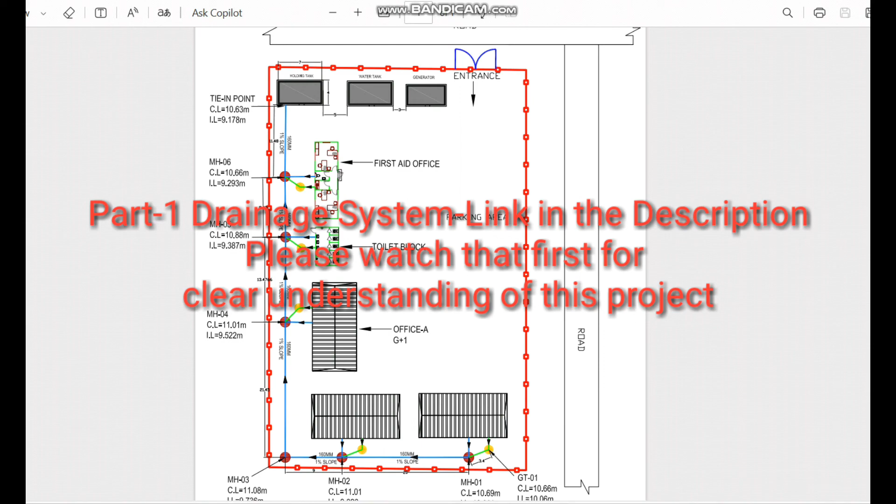In the last video of the drainage pipe system, we discussed the location of the holding tank, like where to place the tank, ground level or cover level, then the invert level of the pipelines, then the purpose of the gully trap, then different cases of drainage pipe connection from building to manhole and which one is acceptable. Then we discussed the pipe slope requirement as per IPC and how to find out the correct slope.

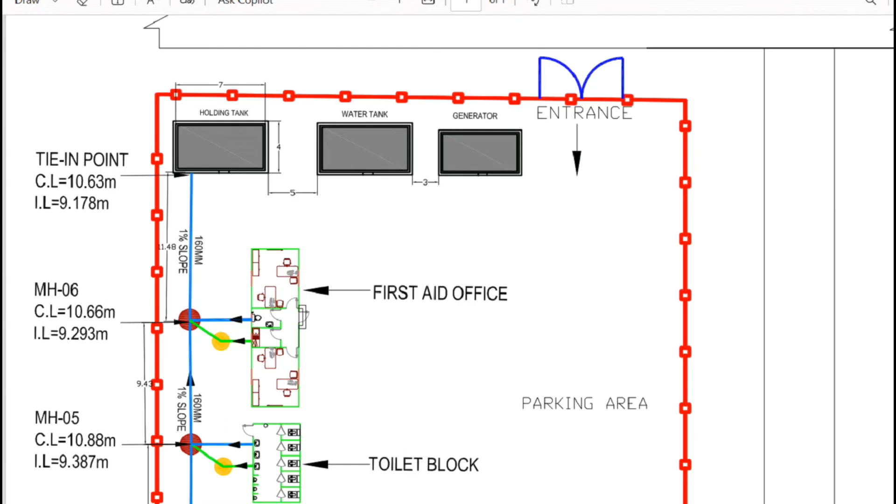In this site office project, we have manholes for collection at each building block. So here all our connections are going to the holding tank. So in this project I propose a holding tank, but most of the time I see people get confused between the holding tank and septic tank; actually both are different. So let me explain this concept very quickly and then we will continue our next discussion.

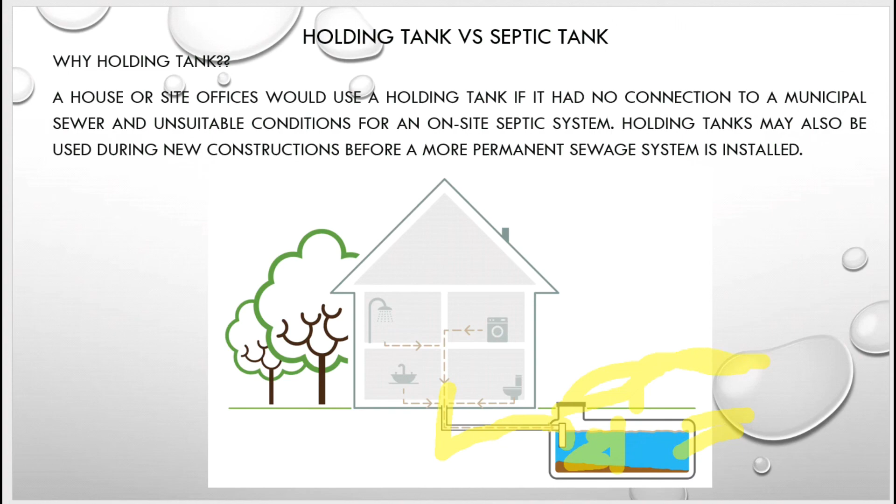So in this image, the sewer water and the waste water is discharged to the holding tank. Here only an inlet is available in the holding tank and there is no outlet. The holding tank water is removed by using the tanker; the septic tank tanker will come and take the water from here. There will not be any outlet and also there is no partition wall like you normally see in the septic tank. So we don't have any arrangement here to segregate the water and solid material which is collected. Only the tanker will come and take the water from the holding tank. So this is the holding tank concept.

When it comes to the septic tank, again the sewer and wastewater is discharged to the septic tank. It has an inlet baffle wall, outlet baffle wall, and a partition wall. In this septic tank, the water is treated. That means the solid particles go to the downside, the scum reaches the top layer, and only the liquid goes to the outside. After this treatment, it goes to the municipality to connect with the existing line. Otherwise, it is discharged, meaning it will be collected in the soak pit. So there is a big difference: in the septic tank the treatment is done, in the holding tank the treatment is not done.

Here I am not going to explain in detail the working principle of these two. We are concentrating only on the design and the installation here.

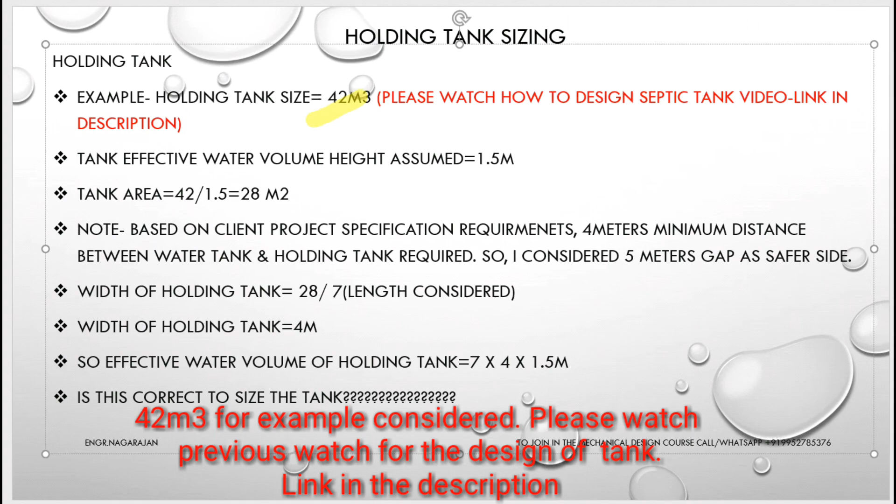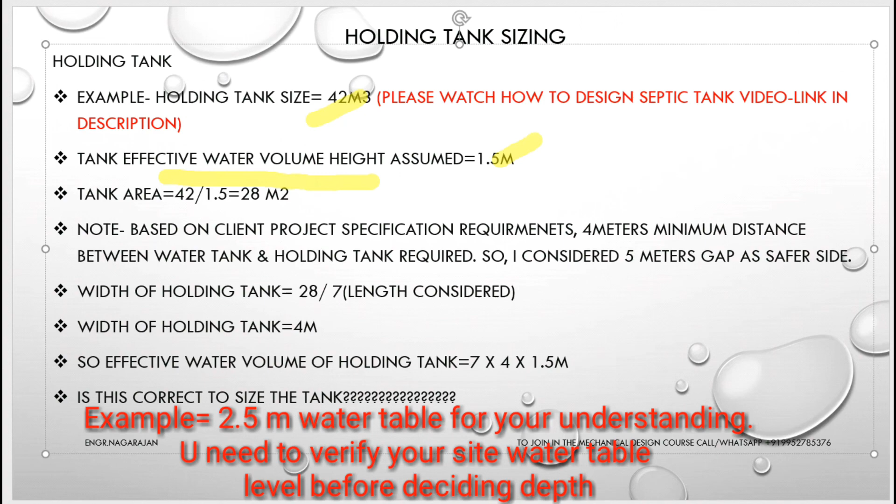Coming to the calculation, based on my design, I got the total holding tank size as 42 cubic meters. Now I want to see the total effective water volume height. I assumed here 1.5 meters. You can finalize this as 1 meter, 2 meters, 2.5 meters based on the water table. Suppose in your area, if you dig 2 or 3 meters in the ground and you are receiving water, you cannot go to that depth. So you have to reduce the height and increase the length and width. In my project I don't have that type of issue, but I consider 1.5 meters as a minimum height.

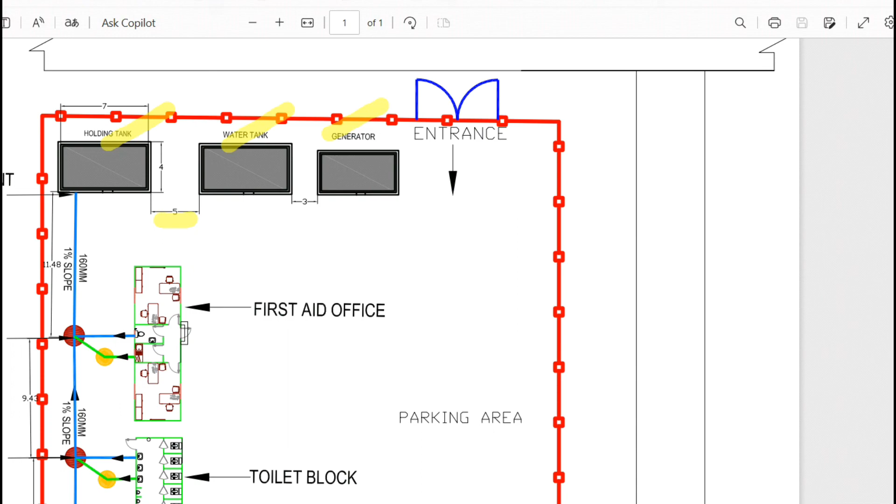So the tank area is volume 42 cubic meters divided by 1.5 meters, which is 28 square meters. Based on the client project specification requirement, a 4 meter minimum distance should be kept between the water tank and holding tank. Here we have the holding tank, water tank and generator, all located in the same area. As per client instruction, a minimum 4 meter gap should be maintained. For the safe side, I consider a 5 meter gap between these two tanks.

Coming back to the calculation, I got the area, and I divided by 7. I consider the length as 7 so I can maintain the 5 meter gap between the holding tank and water tank. So I got the width of 4 meters. Finally, the effective water volume of the holding tank is 7 meters length, width 4 meters, and total assumed height 1.5 meters. So finally, is this correct to size the holding tank? That is the question here.

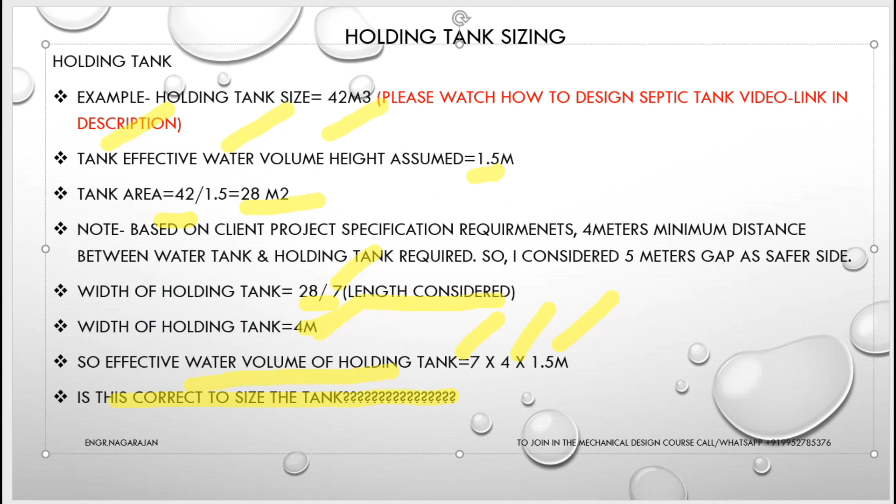Whatever we did so far is correct, but if I stop at this point, then it is wrong. Sometimes you might have seen that a designer will size a holding tank or septic tank for 3 days holding capacity, but the tank will fill very fast in 1 day. That is because of the design issue which we are going to see now, and how to correct it. Here we have manhole 6, which is the last manhole connecting with this holding tank. I am going to explain two different conditions, the correct one and the wrong one. Then you will understand which one you have to do.

So here in the first case, as I've shown here, manhole 06 to the holding tank connection. Here the pipe size is 160 mm, the slope is 1%, and the distance between these two is 11.48. So here are the cover level and invert level, and if you take cover level minus invert level, it will be the depth.

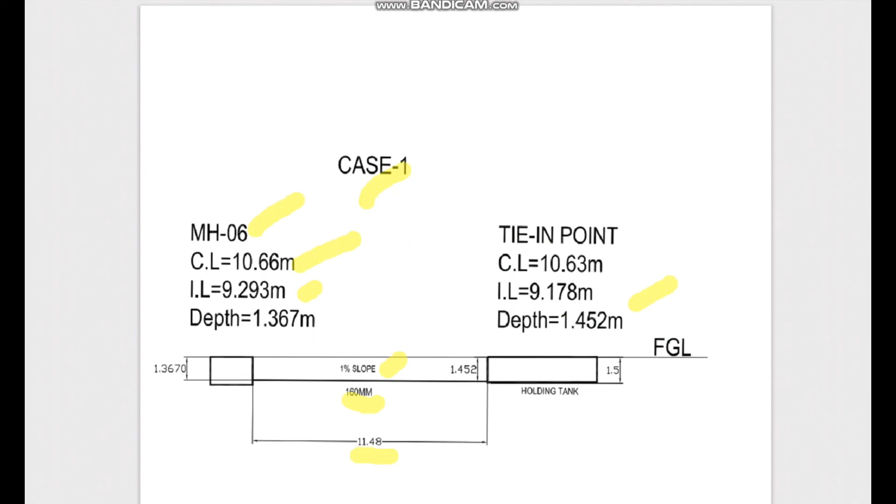So from the finished level, I marked the depth, that is 1.3670 from here. Similarly for the holding tank, the depth is 1.452; that one I also marked here for the pipe, meaning the incoming pipe. And as per the calculation we received, we assumed a 1.5 meter depth.

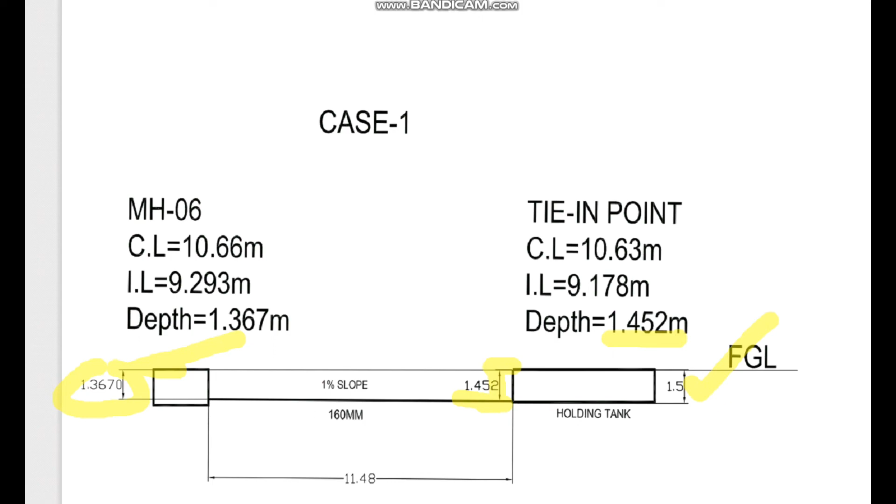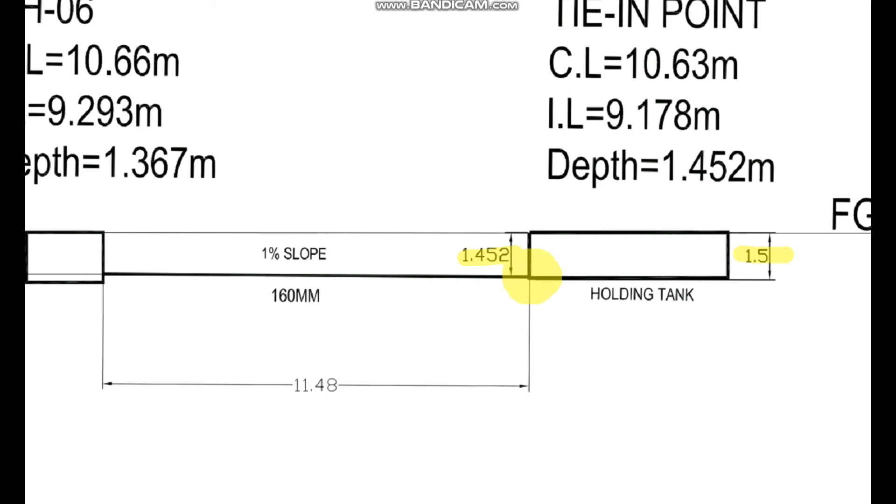So here, this pipe depth is 1.452 and the holding tank depth I assumed is 1.5 meter. If you subtract 1.452 from 1.5 meter, you will get only a 48 mm gap between the bottom of the pipe and the top of the holding tank. So the space is not sufficient to hold all this sewer water, and finally, this installation is not acceptable. So let's see what the correct one is.

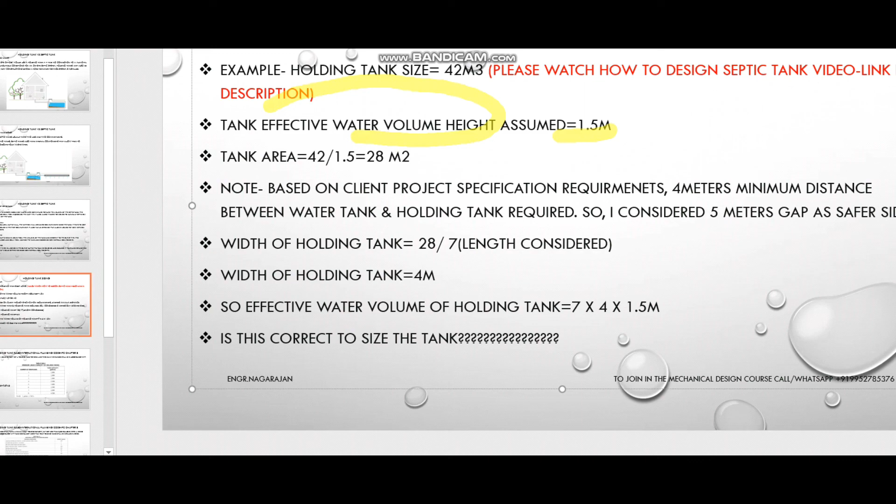Coming to case 2, at manhole number 6 the depth is 1.367 meter. I consider the same 1.367 meter depth from the finished ground level. After the pipe slopes from here to the holding tank, the depth here is 1.452. I followed the same 1.452 meter depth here. And further, I assumed 1.5 meter effective water depth. It's not the tank depth; I assumed the effective water depth is 1.5 meter.

So what I did here is add this 1.452 depth to the 1.5 meter effective water depth to size the holding tank height. Now in this case, the water from this point will go into the holding tank. In this space I have the effective water volume, and above it will act as freeboard. So this is the correct way to size the holding tank height.

Suppose you assume the same pipe but with a higher slope, so the pipe still ends at this point. Then, assuming the height is 1.5 meter, from this point you go 1.5 meter higher. And above this point up to the finished ground level, all this space will be freeboard space.

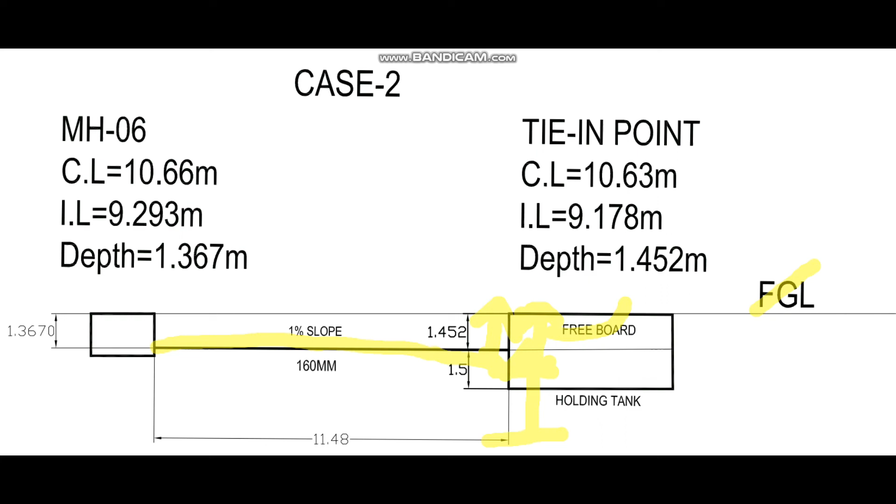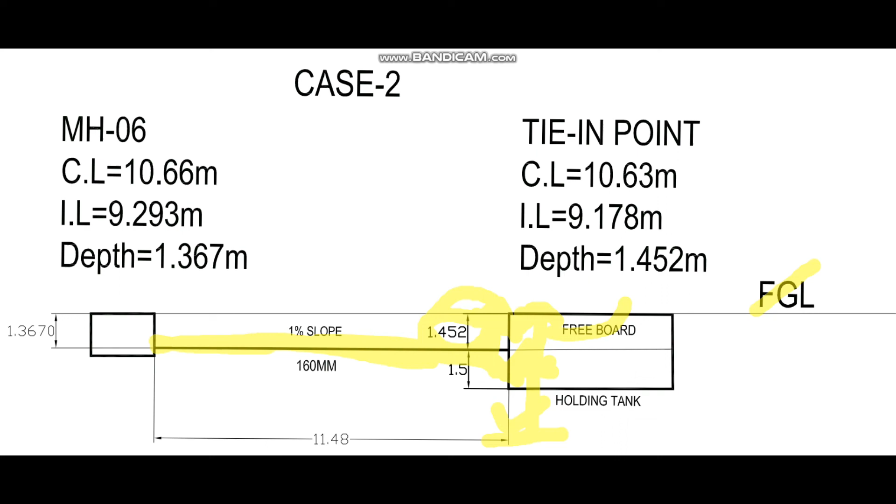You may think this height is very high, why should I leave this space like this? But this is the correct way of installation, because you are assuming the effective water height going down. The space above stays empty because the pipe has to slope from the start to the end. So we have to have these free spaces for the freeboard. I hope this concept is clear. We will move to the next discussion.

When it comes to holding tank sizing, the International Plumbing Code chapter 8 gives default holding tank sizes. For example, based on the number of bedrooms in single or two family houses, we can follow this table to size the holding tank. But if you ask me, I will not follow these sizes blindly.

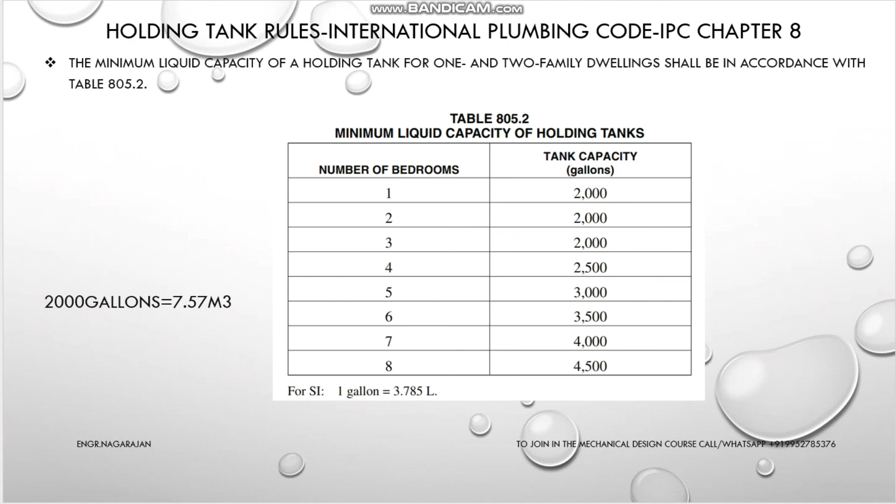Here, for example, if you have 4 bedrooms, the holding tank size is directly 2500 gallons. The next one is for other buildings. Other buildings will have a minimum of 5-day holding capacity, but not less than 2000 gallons. That's the minimum capacity.

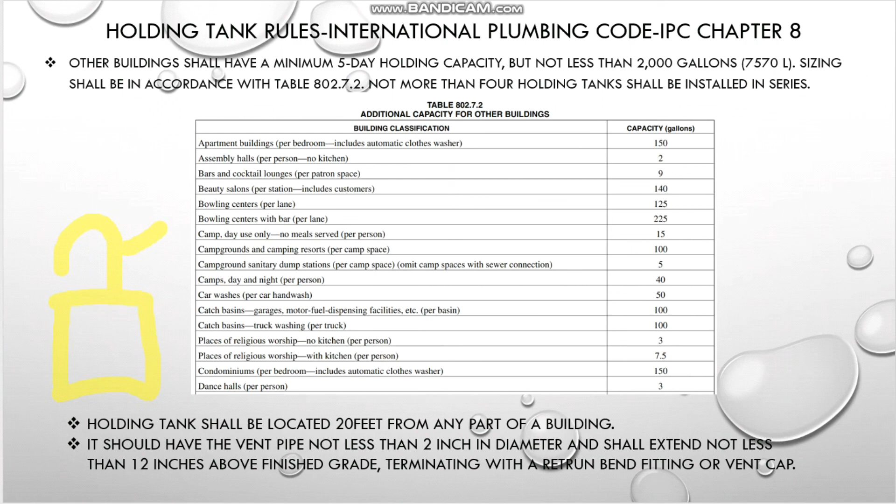For example, for a dance hall we need 3 gallons per person. If you have a dance hall capacity of 100 people, then you consider 100 times 3, a 300 gallon holding tank. And importantly, holding tanks shall be located 20 feet from any part of the building. The vent pipe size should be 2 inch and the height should be minimum 12 inch.

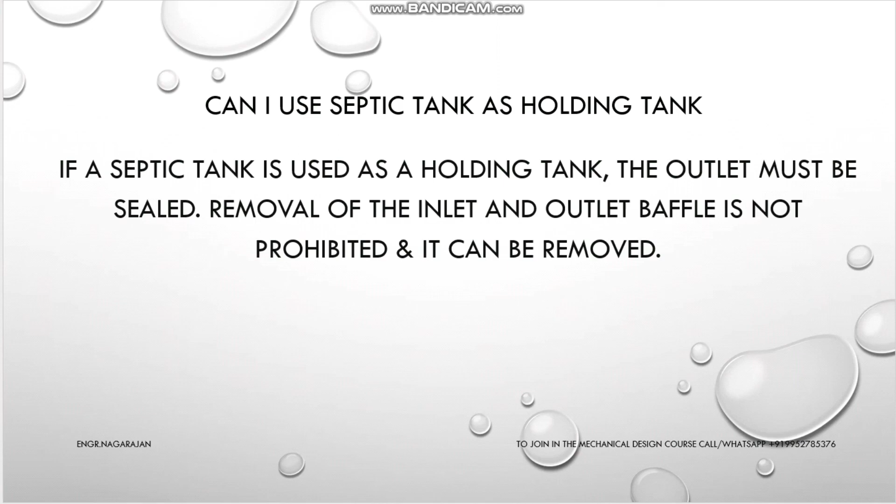Finally, I will close this video with an interesting question: can I use a septic tank as a holding tank? Yes, if a septic tank is used as a holding tank, the outlet must be sealed. Removal of the inlet and outlet baffles is not prohibited, and they can be removed.

Second, you can remove the inlet baffle and outlet baffle. There is no rule that you must keep these baffles. You can simply remove them so that the water discharges directly to the holding tank. I mean, the septic tank is acting as a holding tank in this case.